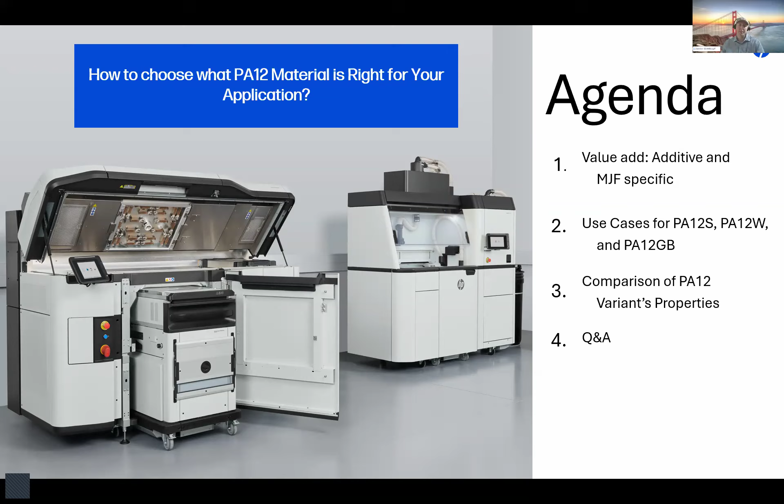So first, I'm going to start with a little bit of the added value of additive and MJF specific—why should you choose this technology? Then we're going to dive deep into some use cases, focusing on our 3 variant materials: PA12S or PA12 Smooth, PA12 White, and PA12 Glass Beads. Finally, I'm going to give you a little overarching summary of the PA12 variants' properties, so you can see and try to apply towards your application why you might want to choose one of these alternative PA12 materials versus our incumbent PA12.

So jumping right into it, there's a lot of manufacturers out there, a lot of people doing design or engineering work, and you're looking at comparing new additive manufacturing techniques with conventional manufacturing or other 3D print methods. So I like to give this slide as a bit of an overview of why you might want to choose those applications. First, looking at conventional injection molds, CNC—one of the reasons why you might want to go into additive is customization, new and complex design, production flexibility, cost, and lead time savings. All of these are captured in various 3D printing technologies. But then you made that decision—why do you want to choose MJF?

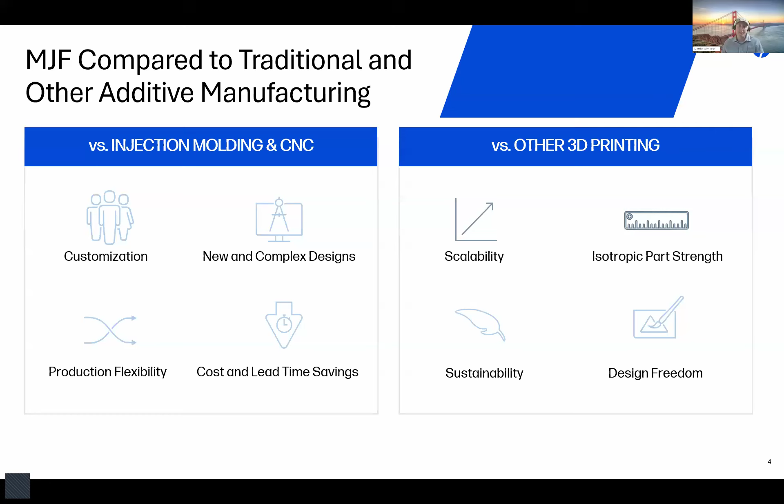So really, compared with other 3D print technologies, we like to focus on the scalability of additive manufacturing, taking it not only from these new and complex designs, but new and complex designs for full production. So you could satisfy not only your beta customers, but all of your customers. Then looking at isotropic part strength, sustainability, and design freedom—all these metrics really give us the ability to create scalable applications that deliver the same part every single time.

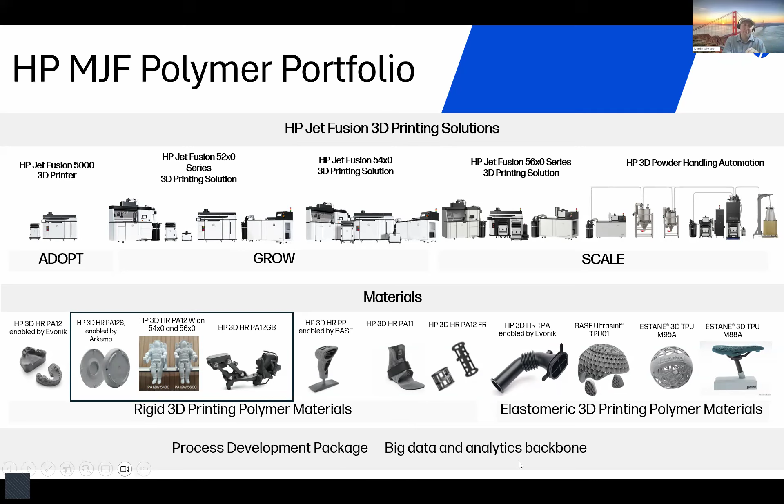So if we take a look at our overarching polymer portfolio, we have our MJF 5000 series, and there's a bunch of different variants depending on where you are—if you're looking just to adopt, grow, or scale fully into heavy production. There's a wide variety of solutions that we'll cover in future webinars, or have covered in some of our past ones. Feel free to take a deeper dive there or reach out to us if you're looking for more information. But today, we're going to focus on the materials. And in the materials, the first set of them is the PA12. Today I'm going to be covering the variant materials, like I mentioned: smooth, white, and glass bead.

Just a big overview of them. PA12, really great for a lot of different applications. It delivers low cost, recyclability, mechanical properties, and has been widely used in a lot of different applications from industrial to healthcare to automotive.

But sometimes these application spaces need just a little bit more, and so this is where we offer options like PA12 Smooth. PA12 Smooth has a smoother surface finish, a lower cost to produce due to its higher refresh ratio capabilities, and it might eliminate the need for post processes.

This can allow your quicker time to part, lower total part cost, and directly delivering to your application right out of the printer. PA12 White offers a brighter, more vibrant color, so this allows you to either have the white color for your application space or really to give you the ability to dye and have a wider color gamut.

And finally, looking at PA12 glass beads, this is really useful in a lot of industrial applications where stiffness and rigidity are essential. Also, invariance to changes, whether it be a thermal environment or a humidity environment.

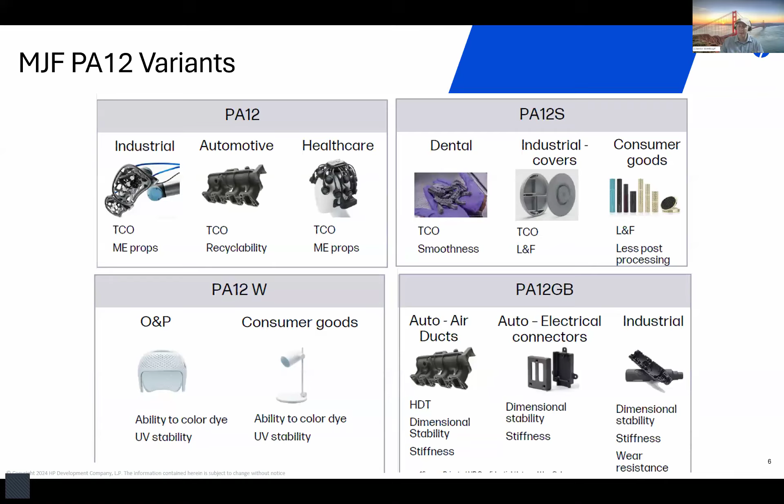So jumping into it, I'm going to start highlighting some use cases because I think that's really where the bread and butter of highlighting how these different variant materials are useful in our different industries.

As a little bit of an overview, PA12 Smooth has different application spaces compared to our conventional PA12. This is really recommended for things like the consumer goods space, where you have a very low cost to entry and you want to drive that part cost because you may have other assembly techniques that go into it. Dental and also industrial, where you're making jigs and fixtures that are maybe consumable or changing all the time, and you don't want to put a lot of part cost in there.

So in this application space, I'm going to highlight in various slides, I'm going to look at something like dental molds, volume prototyping of certain lightweight parts, lighting, aesthetic covers, etc.

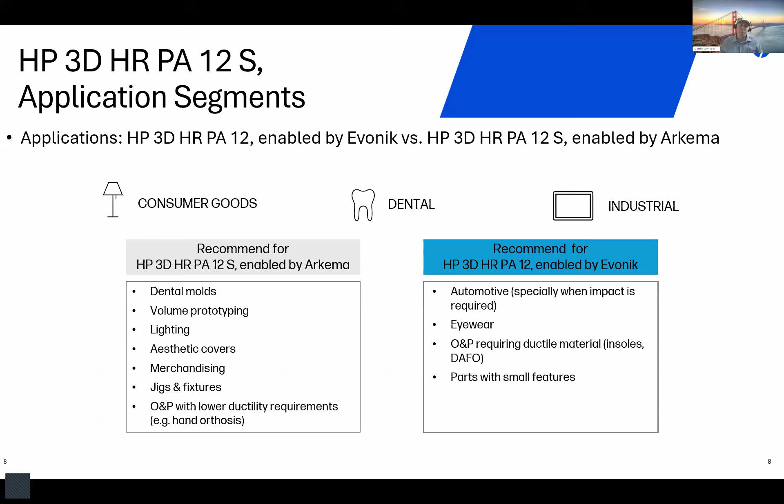Some of the times where you may not want to consider this material is if you do have higher mechanical property needs. So for example, in the O&P market, if you have insoles or things that are going to be facing repeated mechanical stresses, this is where the conventional PA comes in, and I'll cover more of those in our later slides where we focus on the differences.

But right now, I want to hop in and highlight some of the application spaces that have seen success with this material. So one of the first ones I want to show is a bike bib holder.

This is something used in sports equipment or the consumer goods space where you have all these accessories that you want to add to whatever application you have. In this case, it's looking at road bikes. If you compete, you'll have a biker bib that'll have your number or your ID or registration for whatever race you're taking part in, or maybe you just want to highlight some of your flair as you're driving down the road.

So this allows a consumer, in this case Decathlon, to manufacture these accessories that fit your make and model of the bike, giving you that customization towards what you're looking for. You also have the ability to change logos and things like this, which is ubiquitous across our 3D technology, but the cost really prevents these from going into mass appeal with other materials like conventional PA12, where PA12 Smooth has this high cost reduction, allowing up to 25% cheaper.

Also, the improved quality of the surface finish out of the printer really enhances the ability to print, post-process by just sandblasting, and then dye and deliver. And really with this, you create this on-demand production where you don't have to have SKUs of these sitting in a warehouse. You can manufacture just in time. If a customer orders, it could be purchased, it could be customized, and it could be delivered.

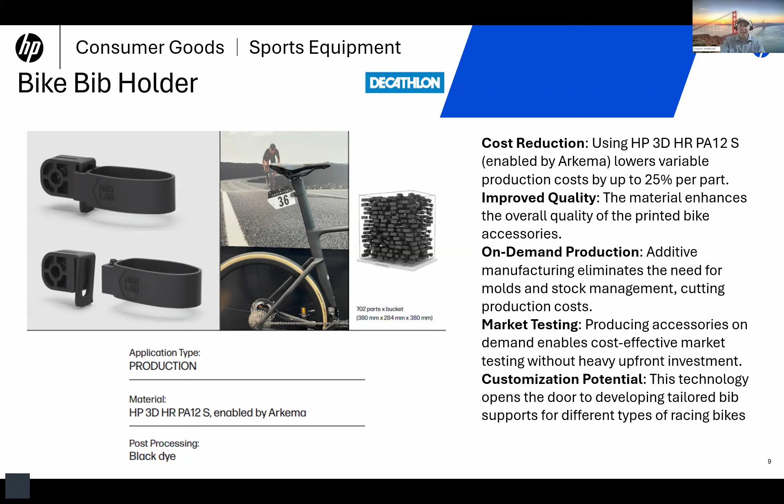And then this allows for market testing. You could test the waters. These could be giveaways that highlight a particular event, and really that leads into the customization potential. I really see that as a big space for additive, and PA12 Smooth with its lower cost really helps to enable it.

Another application space is a bike connector cover. As EV bikes are starting to become a bigger application space, accessories to suit them are also becoming large, and there are some parts that unfortunately get lost. One of the things that gets lost a lot is the bike cover or the electrical cover for your charging port. So with this, Decathlon also decided to design some conventional designs that will fit standard EV bikes that allow the customer to customize, to have this protective function in case they accidentally lose it.

But also deliver this at a lower cost where conventional manufacturing technologies may be able to achieve the low cost, but you don't get that customization and you don't get that brand labeling or direct customer labeling to allow you to feel personalized to these parts. Which again is another really big application space for additive manufacturing, being able to deliver something right for your customer at the cost, at the function.

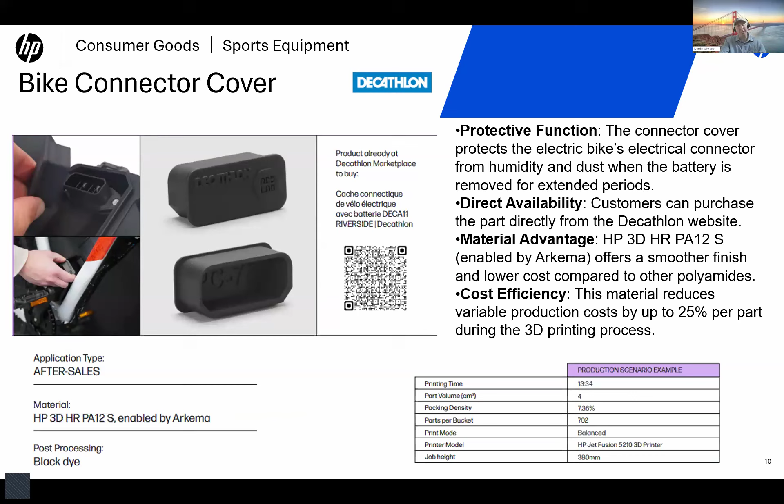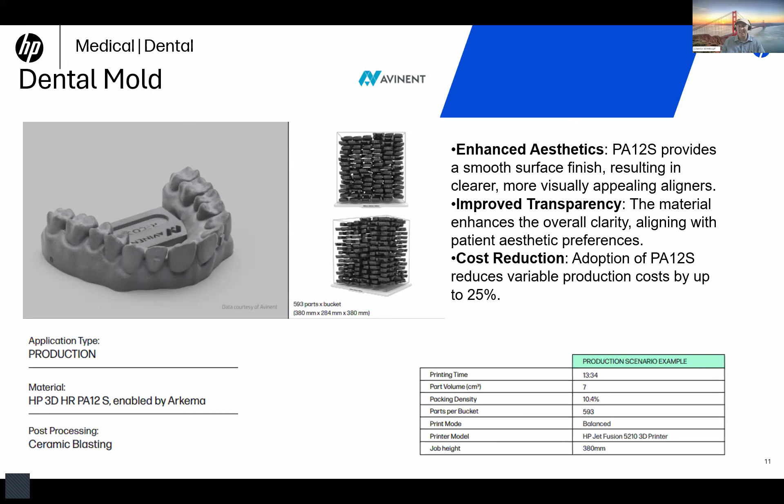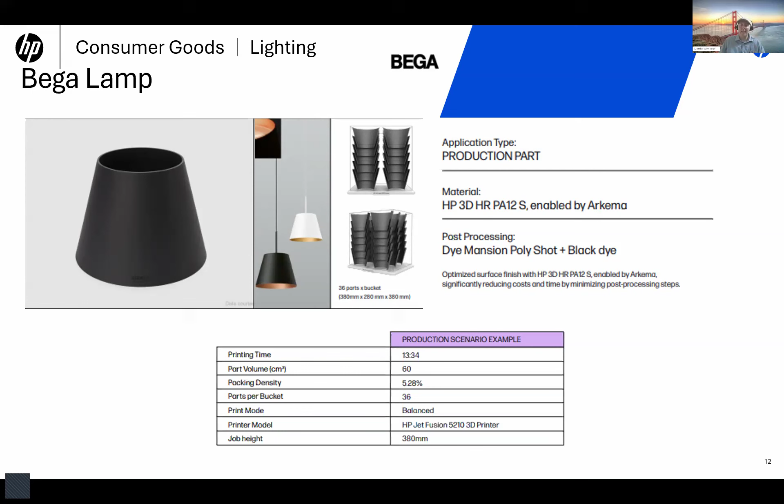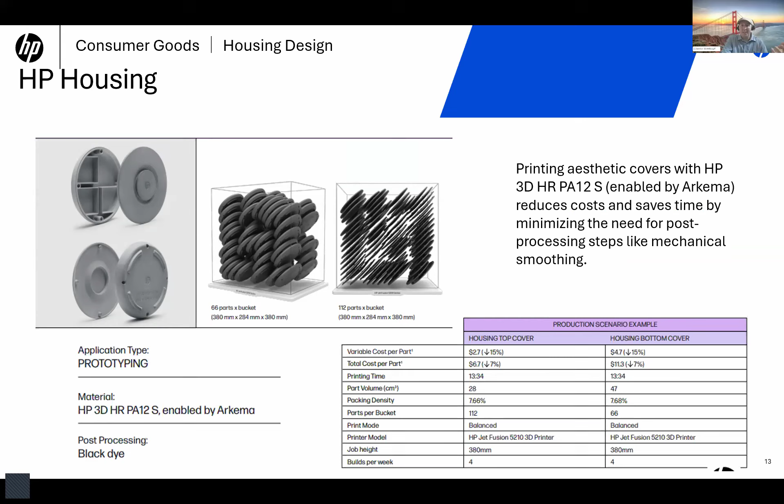Finally, one of the PA12 Smooth applications I want to highlight is in consumer goods in the housing industry, looking at lamp covers where you could have custom aesthetics for your home, allowing interior designers design freedom and variability so they don't have to buy things off the shelf. They can custom create, but at acceptable costs. Looking at housing covers for lamps, light fixtures, and switches that may not have been seen before - this opens up aesthetic design changes, but also really gets some creative application spaces going, driving innovation on all fronts from design to use cases.

Finally, I wanted to highlight a little bit of post-processing for PA12 Smooth. It really lines up well with our PA12 conventional, but really enhances the surface finish with less application. Conventional sandblasting is heavily the workhorse in cleaning the powder off of our powder bed fusion based MJF technology. With PA12 Smooth, you get quicker time to a smoother finish.

Again, our dyeing and vapor polishing processes still work on this material. So if you need a next level enhancement, you could achieve that with vapor polishing. Similar dyeing options to PA12 are also available, and this starts with a grayer base, so you typically are stretching into the darker color gamuts of additive dyeing solutions.

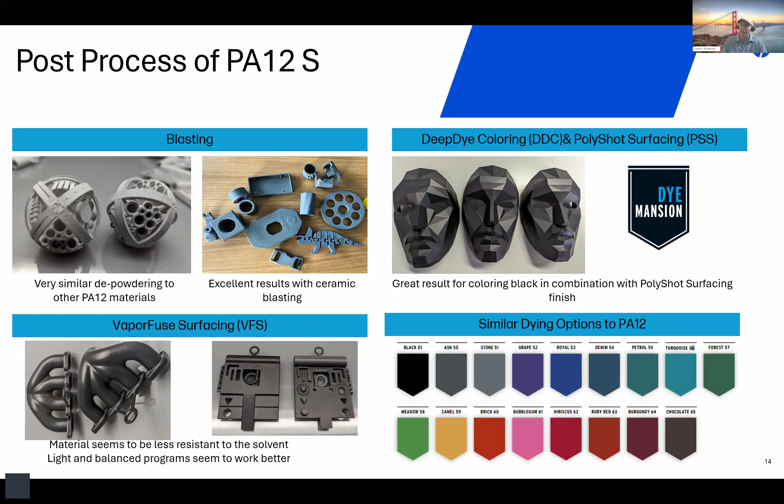So overall, just to highlight, PA12 Smooth really focuses on cosmetic, low part cost, and minimizing waste with its exercising the higher refresh ratio.

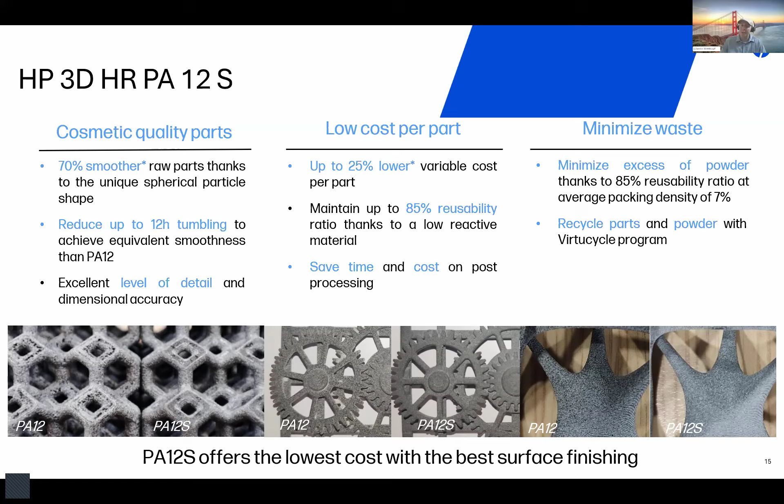So now I'm going to hop into our next variant, PA12 White. PA12 White really offers the similar durable and high-performing PA12 properties with an enhanced white color. We achieve this through some additives to the powder to brighten up that powder color, as well as a different agent system that doesn't provide that black dyeing effect as it's going through our MJF process.

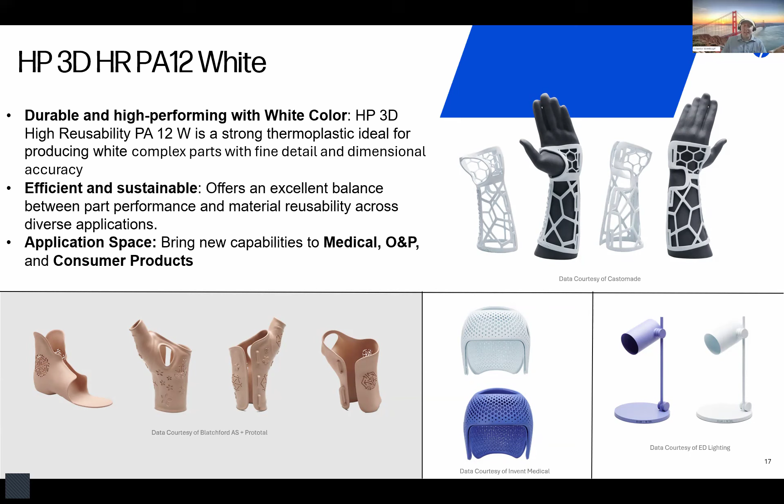Again, it's efficient and sustainable, offers that balance between part performance and material reusability, and it's great for applications like medical, orthotics and prosthetics, and consumer products where either white is a requirement or you want to diversify that color spectrum of dyeing. So I'm going to highlight a couple examples here.

This one is a cranial orthotic, which really focuses on correcting deformities in infant head shapes. Invent Medical has launched this in partnership with MJF, highlighting their ability to create design aesthetics using additive manufacturing, but also deliver colors that are both child and parent friendly. When you're putting a helmet on your newborn's head, you want it to be a bright, vibrant color - you want it to light up the day. That's really where PA12 White allows that improved aesthetic customization, but also that post-processing freedom to meet those color palettes desired by both the customer and the clinicians alike.

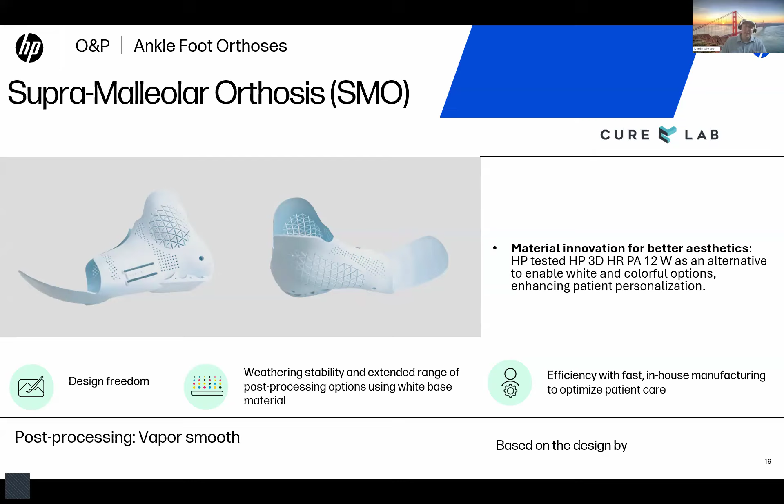The additive we add to the powder also enhances its UV stability. So if something is going to be on your foot and exposed, you don't want it to degrade in the sunshine or change that color palette, and our PA12 white additive actually helps enhance that. This allows for efficient in-house manufacturing, optimizing patient care, going from scan to a part that is a one-to-one correlation, eliminating post processes, which is a big reason why the O&P industry has adopted 3D printing.

Finally, looking at Castomade for the O&P customers, really focusing on printing custom casts to prevent or heal twist fractures. Again, taking that similar design aesthetic, that unique open air design to prevent cast smell, and then adding that color facet on top of it, really giving the customer what they want and allowing either customization of coloring solutions on top of their cast as a white template, or being able to go into dyeing solutions and give them the colors they want to accessorize as they're healing from their twist fractures.

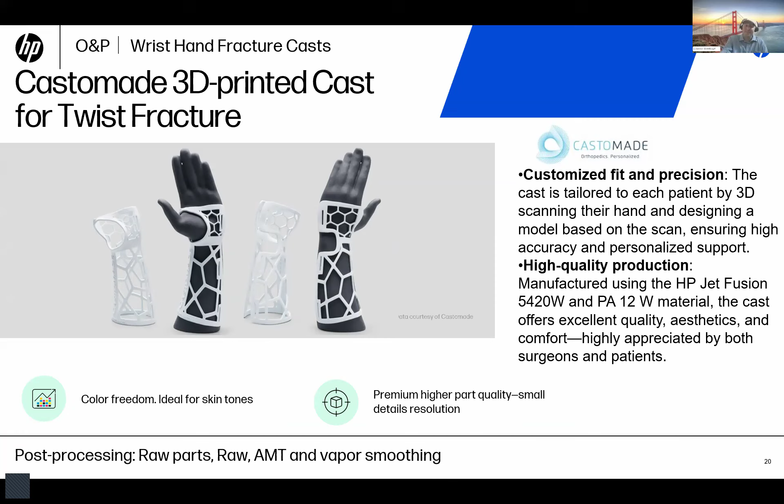Next, looking at medical device covers. As I mentioned, in some medical devices, white is essential. This is something they want in all of their application spaces, that white color, so you can see if it needs to be cleaned off more clearly than if it was a darker hue for an accessory, a device, or anything being installed in a hospital or doctor's office.

By delivering this PA12 white solution utilizing our technology, you get that design freedom. You're able to create these complex freeform designs, but also give that essential white coloring that allows them to meet their standards for installing in medical type scenarios.

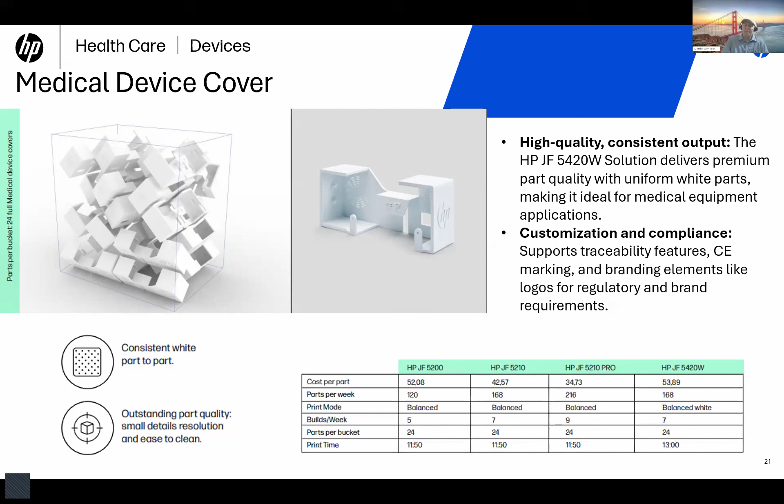I'm going to take another look at some custom eyewear frames, another consumer good application. Getting into the fashion and design space, there's a lot of creativity hindered by either conventional manufacturing's cost requirements or by standardization. The Liq eyewear really enjoyed the design freedom that MJF offered, but with conventional PA12, they didn't have the color freedom or the palettes to test out. Having the PA12 white allowed them to have the mechanical properties necessary to meet their needs, plus give them the opportunity to further express their design creativity.

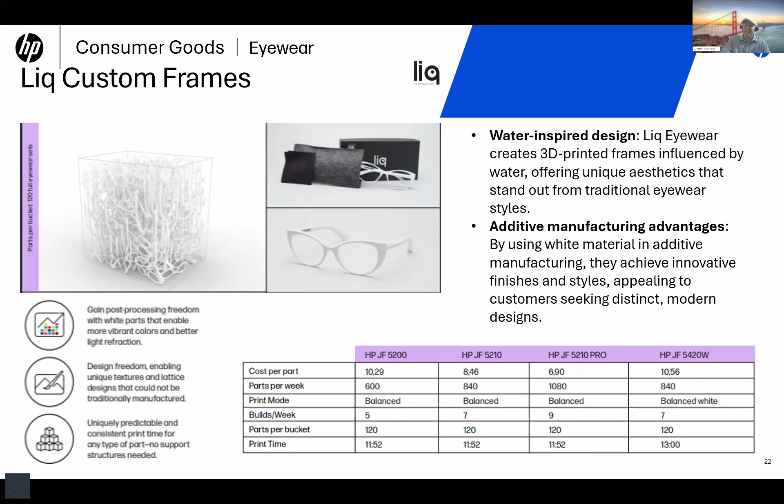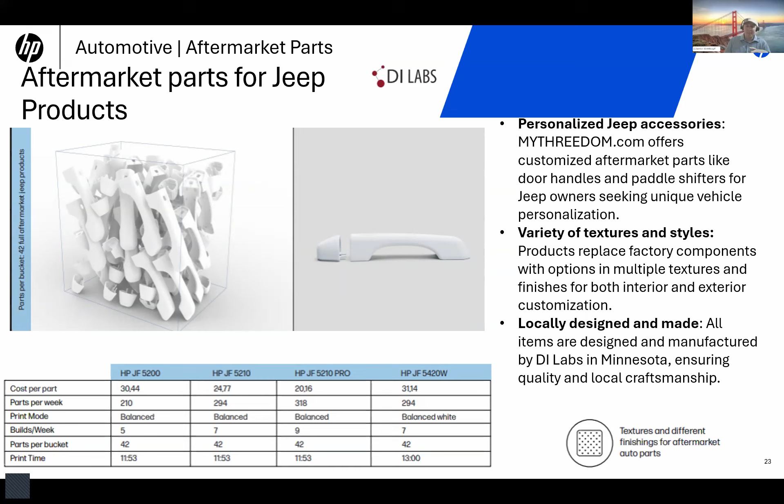Looking at automotive aftermarket parts, that's a big space, not only to provide good high quality parts for legacy cars that have aged out, where OEM parts are either prohibitive or unavailable due to cost, but also to add your own personal flair to your car. Aftermarket parts have utilized the PA12 white to allow for a wide variety of textures, styles, and post-processed colors to give the customer that palette as they choose accessories for their vehicle. I'm highlighting some handles, but there's a wide variety of application spaces that let you translate the plastic elements in your car into custom creations.

One of the things you heard a lot about with PA12 white was that color palette. I wanted to highlight, especially from one of our partners, Dymansion, the enhanced color spectrum you get. You can see the more vivid blues, pinks, and yellows you're able to achieve with this enhanced standard color available on the PA12 white.

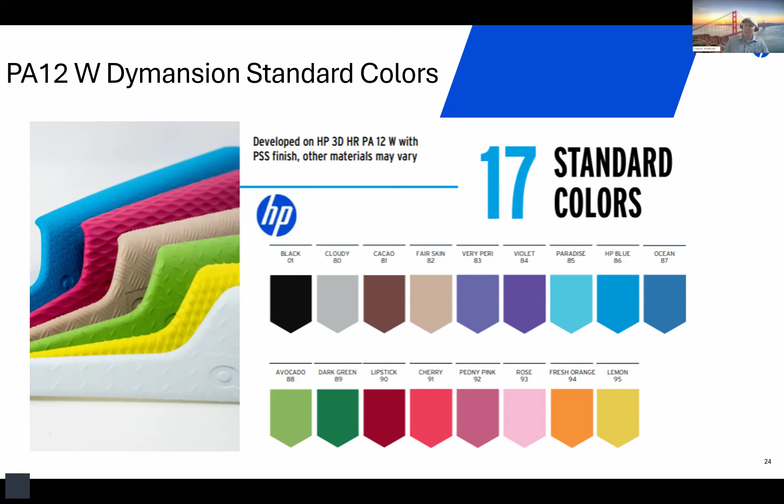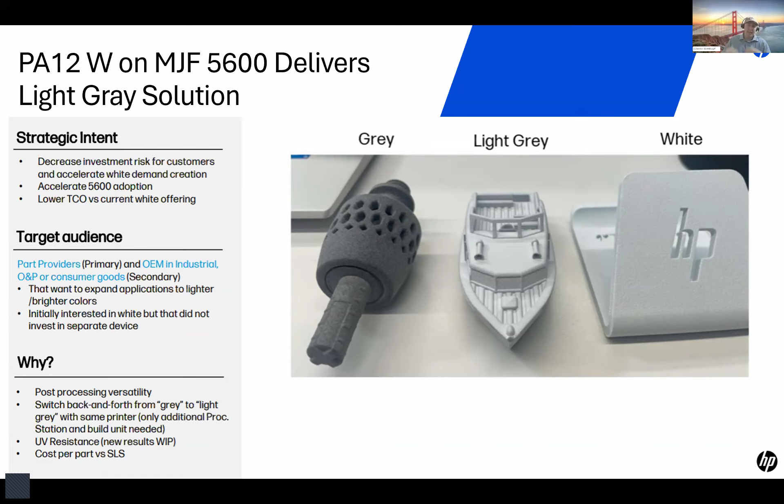Typically our PA12 white solution is only available on our 5400 series printer, which uses the agent that gives that high white popping color. But we've also recently brought this to our newer 5600 line of printers, where you're still using the conventional fusing agent, but with that white additive in the powder, you get what we call the light gray solution. This gives you the best of both worlds—you don't quite hit the white, but it's at a lower price point, so you still exercise some of that wider color gamut. It isn't quite as good as what white would achieve, but it gets you close.

So with that, I'm going to transition over into our last variant, our PA12 glass beads. As I mentioned at the introduction, this is really where dimensional stability, stiffness, and invariance in different environments are essential. Some of the key application spaces that take advantage of this material are industrial and automotive—things like tools, jigs and fixtures, casings, housing, robot end effectors, where you want precision and control, understanding that device will be in the same place after many, many repetitions.

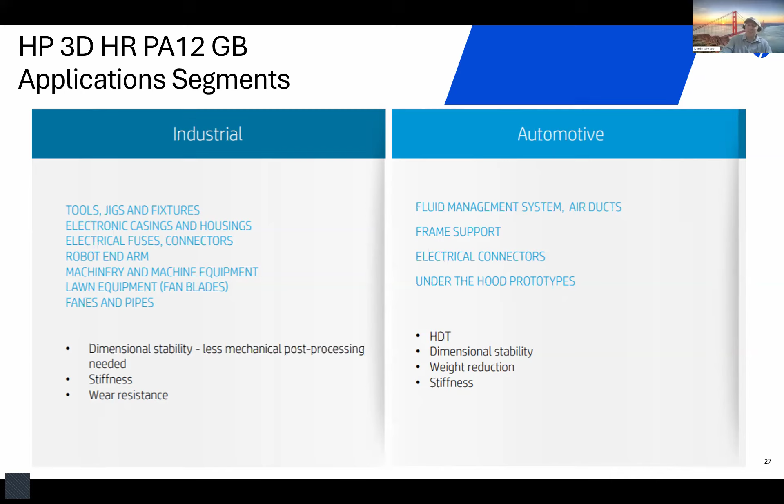And then in automotive, applications like fluid management systems or ducting, frame support, electrical connectors, as well as prototyping where you're creating runs that are actually operating prototypes. You want something that's going to demonstrate something new but also work effectively. This is where PA12 glass beads has been able to offer good solutions.

One of the ones I want to cover first is a solution by Waitkus360, where they built a vacuum end arm tooling. This is a device at the end of one of those cobots or robotic solutions that enables grabbing and vacuum suction to pick up devices. The overall opportunity use was focused on two materials, PA11 and PA12 glass beads.

We'll cover PA11 in another presentation, but PA12 glass bead was great for that strength in different sections of the part, especially because this replaced a traditionally aluminum part. They're used to that rigidity of the metal, and going into the plastic solution helped them save a lot of material cost, manufacturing cost, but also weight. This savings in weight reduced the requirement from the robot controlling the device, giving a whole system they could deliver at a lower cost. That's another great example of replacing an incumbent material or design with something lightweight that has generative design structures that save on the whole solution, not just the part.

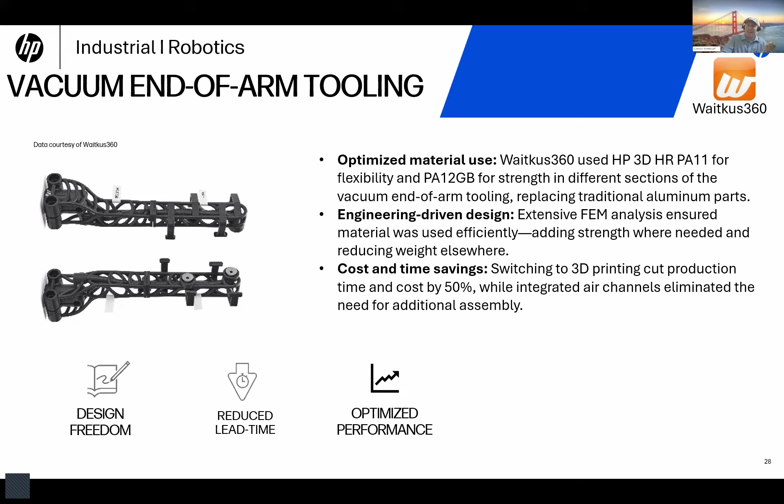Another great example is from ProMetal 3D, where they have a laser cutting apparatus. They were able to replace a machined metal solution that was a multi-part assembly with a single printed piece of PA12 glass beads. This gave them the precision and rapid prototyping to iterate, and also achieve their needs for short run production, so they could create this design, print on demand, and get the same engineering material level performance they were seeing with the conventionally machined metal part.

This significantly improved their weight, achieving about a 75% weight reduction, which enabled smaller, more efficient robots and saved size and space on their installation. Overall, we were able to help them create a better overall solution for their application.

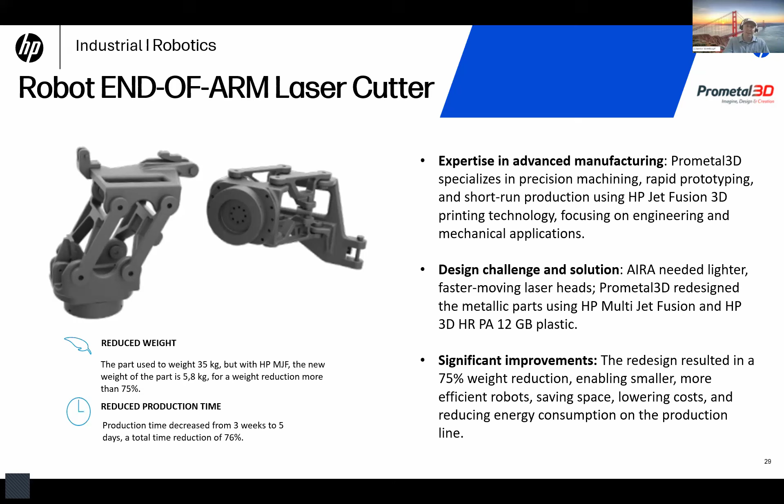Another example is in machine equipment casing. Some casing applications maybe don't have the right rigidity or stiffness for their application if there's going to be heavy stresses placed on it. This is where PA12 glass beads can step in and give you that design freedom, customization, or brand awareness in short run production, but also achieve durable materials that stand up to harsher environmental conditions, as well as give you rigidity so they don't bend and flex like some of the less stiff PA12 variants.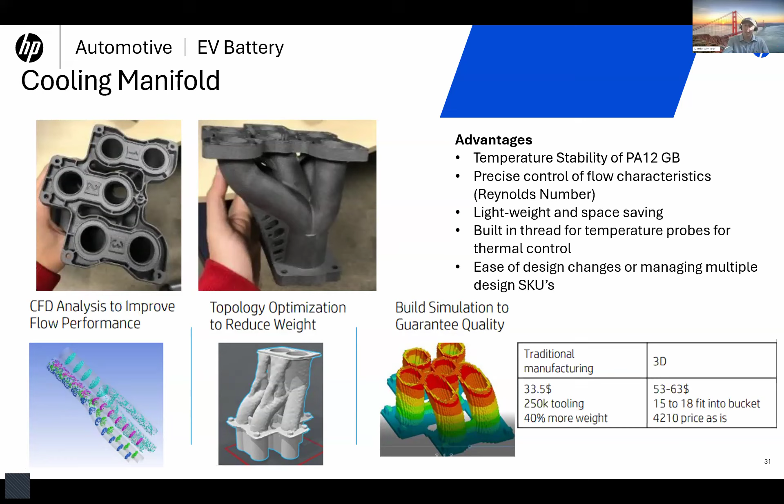Finally, I wanted to end on some other EV opportunities. Anything dealing with temperature fluctuations or electrical connections, PA12 glass beads ends up helping out a lot due to its high HDT, its invariance to change as temperature cycles, its ability to manage fluids for cooling systems, and rigid connectors that hold and keep that same pressure over time for these applications.

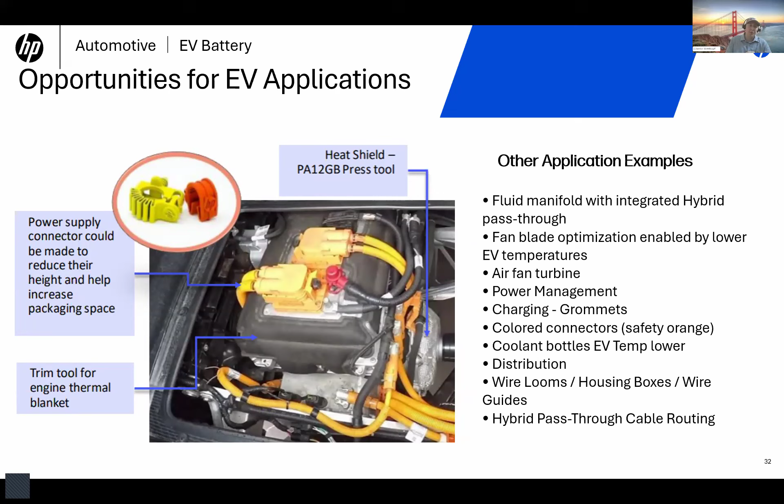Jumping into a summary of the PA12 glass beads, this is ideal for stiff, dimensionally stable, quality parts. It delivers high heat resistance, low change in dimensions in presence of fluid, high resistance to wear if in a repeatable application, and gives a balance between high performance and reusability. You still achieve up to 70% reusability, which isn't significant compared to PA12 Smooth, but that's why we offer these different variants so you can select the material right for you.

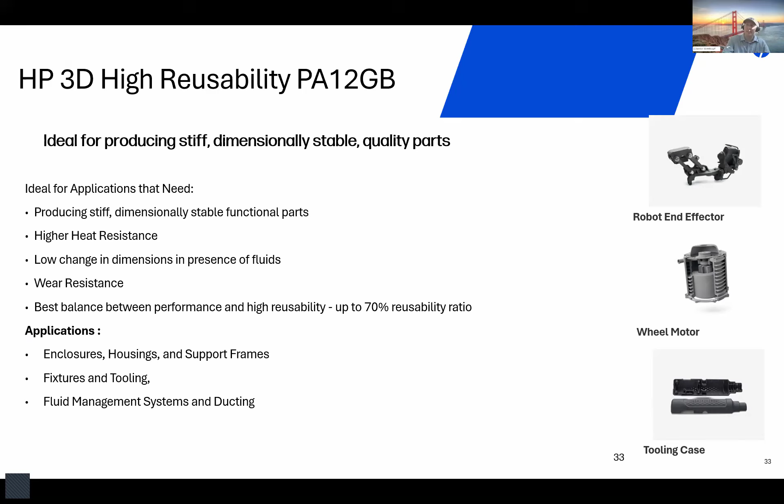Enclosures, housing, frames and supports, fixtures and toolings, as well as fluid management systems are great for this material. So finally, in the last few minutes, I'll highlight some of the variant properties with some nice comparisons. There are also other materials in there, so you'll see where PA11 and polypropylene compare — those will be covered in future presentations.

What we see is PA12 smooth, PA12 glass beads, and PA12 white in light blue, dark blue, teal, and orange colors. Looking at strength, PA12 is still the strongest contender, where PA12 white takes a little hit due to additives. PA12 smooth offers surface smoothness but at the cost of some mechanical properties in terms of strength. PA12 glass beads, even though more rigid, isn't as flexible, so the strength figure of merit takes a hit, also highlighted in elongation at break.

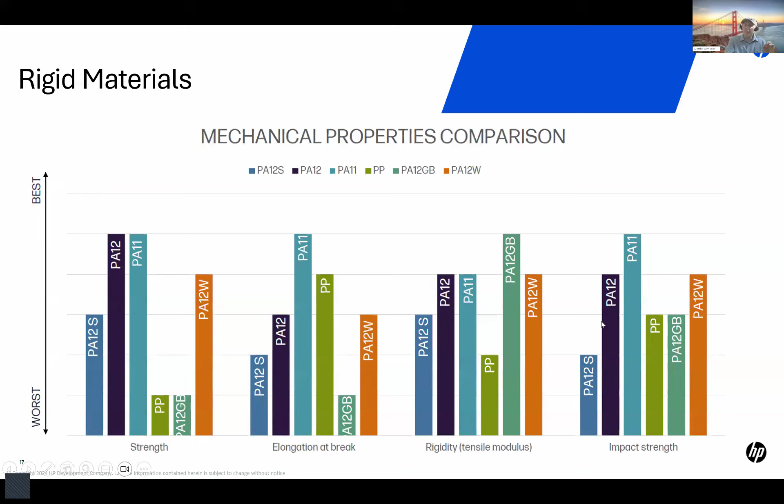But as you go into rigidity or tensile modulus, the glass bead stands out ahead. In impact strength, they all have somewhat nominal performance, with PA12 and PA12 white having high performance and PA12 smooth falling behind.

Taking into consideration more aesthetic or softer properties — look and feel — PA12 smooth straight out of the printer gives great properties, along with PA12 and PA12 white, followed finally by PA12 glass beads. Dimensional properties, all of them perform strong, really meeting those fine features. PA12 glass beads, being a bit of a composite, does have some stricter design guidelines.

Variable cost per part: PA12 smooth obviously stands out, with PA12 being mid-range, and PA12 white and PA12 glass beads being comparable in price. With reusability ratios, smooth stands out as the front runner, again correlating to cost, with PA12 having the next best refresh ratio, and glass beads and white being very comparable.

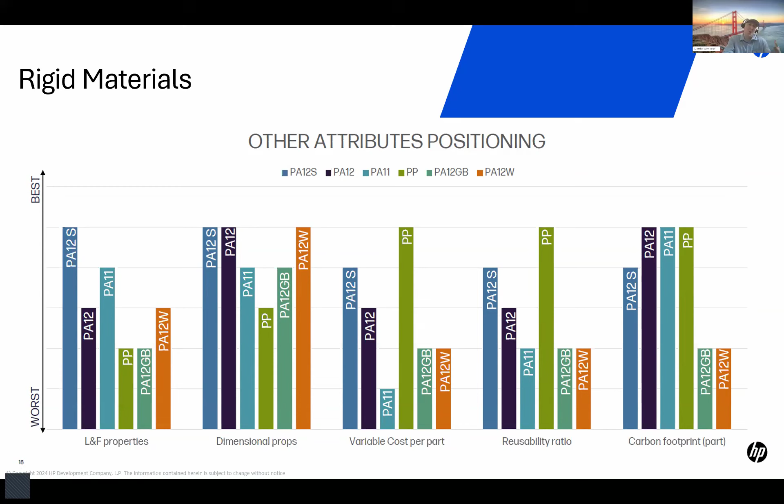And in carbon footprint, they all achieve well, but the additives introduced into the glass beads and white do stress that a little bit more, adding a bit more carbon footprint to the overall manufacturing process of these powders.

Finally, as a highlight: PA12 is great for strong, functional, highly detailed parts. If you go into the PA12 smooth variant, this gives 70% smoother surface, low warpage, good UV resistance with the best refresh rate. White stands ahead with the colors and color spectrum you're able to achieve, plus UV resistance, but at a bit more cost than conventional PA12. And PA12 glass beads really delivers stiff, dimensionally stable, quality parts for a lot of industrial and robotics applications.